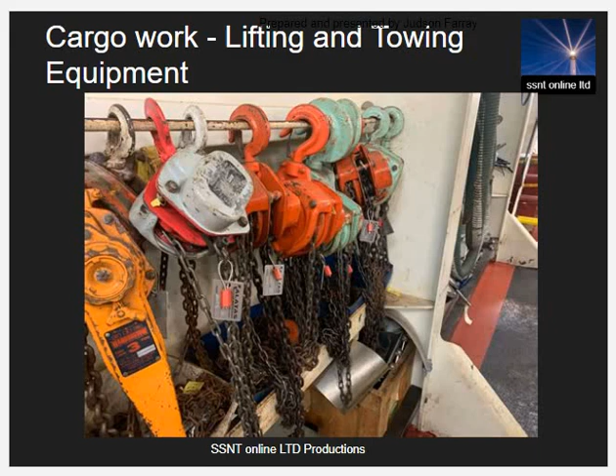All equipment used for lifting and towing operations should be certified and marked with its safe working load, inspected before and after every use, and monitored during use for damage or distortion. The Code of Safe Working Practice for Merchant Seafarers gives details for lifting and towing operations.

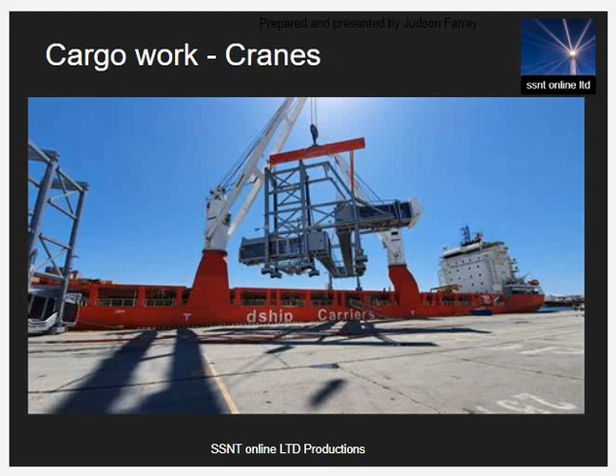The deck crew are directly involved in slinging cargo. The deck crew could be directing crane operators or operating a crane. The deck crew is responsible for securing the cargo to prevent movement of the cargo when the ship is at sea. Shifting cargo often leads to irreversible ship stability problems. These have proved to be catastrophic, especially in bad weather.

The slinging and securing duties involve a lot of manual handling. The Code of Safe Working Practice for Merchant Seafarers gives details for lifting and towing operations.

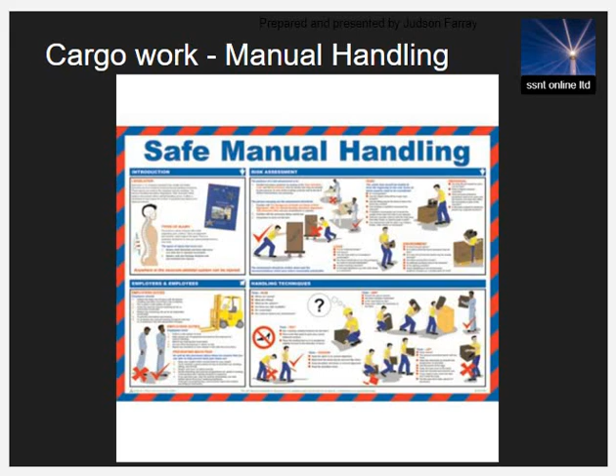Seafarers often carry dangerous goods. Toxicity and flammability are the main hazards. Dangerous goods carried in packages must be marked, handled, and stored as directed in the International Maritime Dangerous Goods Code.

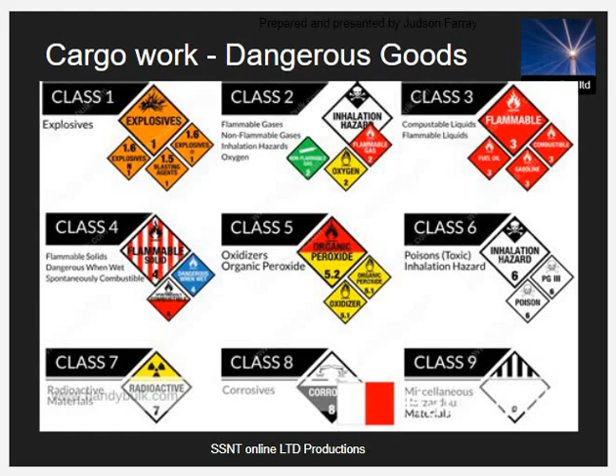When cargo is not in packages, it is carried in bulk. Bulk cargoes would be like oil in an oil tanker, or gravel in a barge.

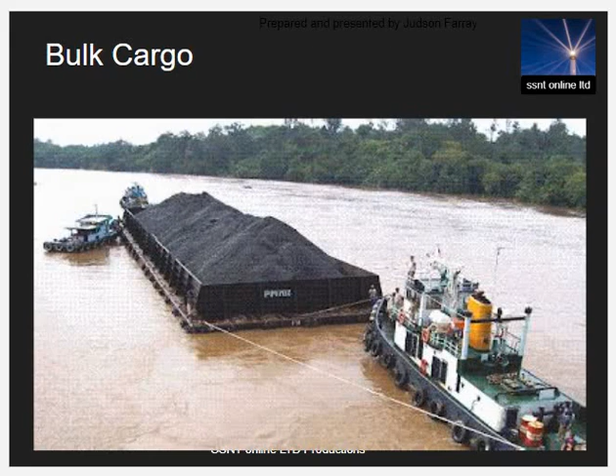The serviceability of the ship and equipment used for loading, carriage and discharge of cargo is top priority. The personnel maintaining the ship should be trained and competent in performing maintenance duties.

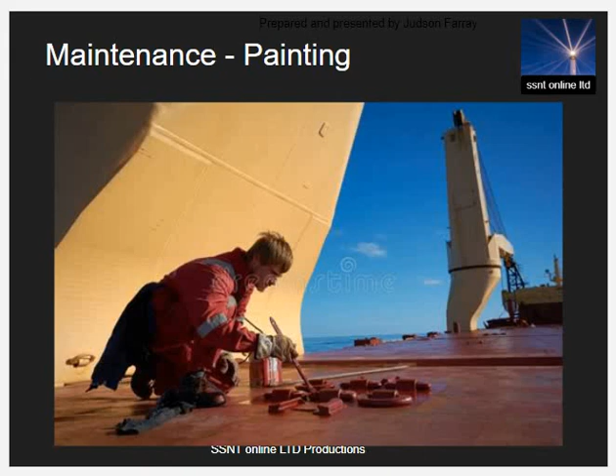The steel surfaces of the ship have to be protected from corrosion in the saltwater environment. This is achieved by cleaning the surfaces and applying layers of paint. Paint and cleaners emit fumes, but these are not a major problem on an open deck. The chemical cleaning, painting, or the repair of tank coatings may involve the release of solvent vapors.

Ships, even those that are not tankers, have many tanks. There are tanks named for what they carry, like freshwater tanks and fuel tanks. There are tanks named after where they are, like forepeak tanks and double-bottom tanks.

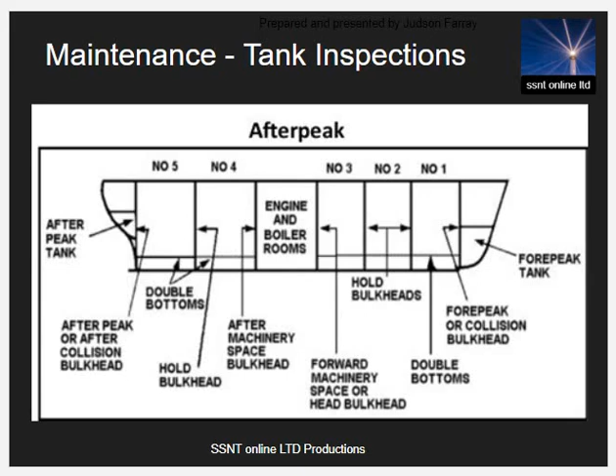Every tank on the ship has to be inspected every year. In bigger ships this involves personnel entering the tank. Entering the tanks allows us to see the condition of the tank coating and to see any damage to the structural members of the ship.

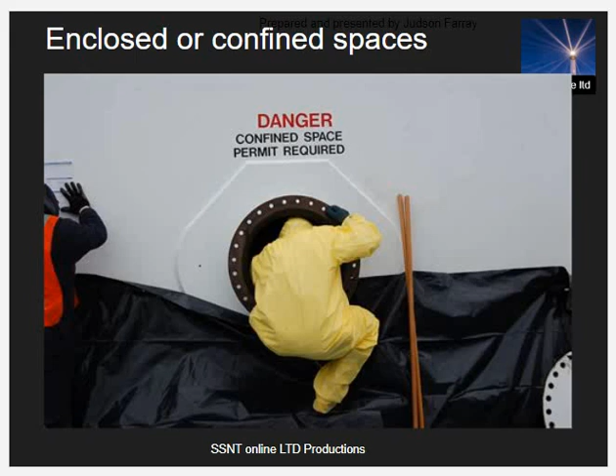When a tank has to be entered, the space should be considered to be deficient in oxygen and/or contain flammable or toxic fumes, gases, or vapors. Where possible, alternative means of working which avoid entering the space should be found.

A competent person should make an assessment of the space and a responsible officer should take charge of the operation. The potential hazards should be identified, and the space should be prepared and secured for entry.

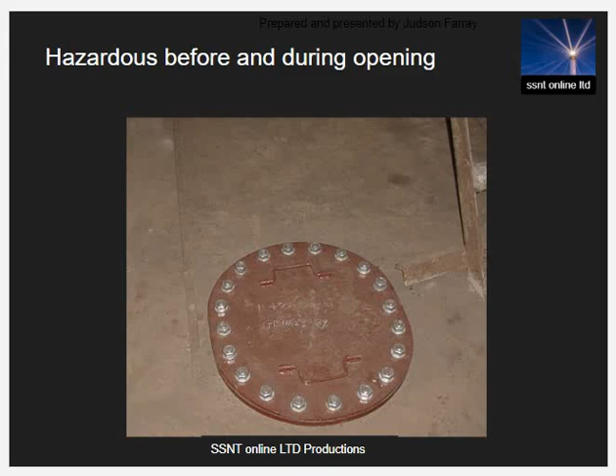When opening the entrance to a potentially dangerous space, precautions should be taken in case pressurized or unpressurized vapor or gases are released from the space. It is for the responsible officer to decide, on the basis of the risk assessment, the procedures to be followed for entry into a potentially dangerous space.

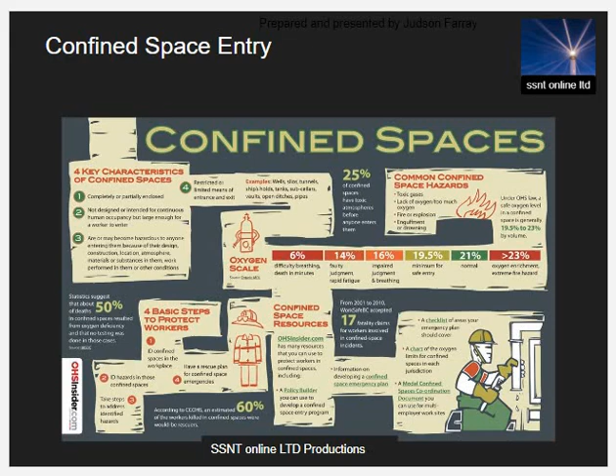Where the assessment shows that there is no immediate risk to health or life but that a risk could arise during the course of the work in the space, the precautions should be taken as appropriate. Where the risk to health or life is immediate, then additional requirements are necessary.

The risk assessment should include consideration of any potential hazards associated with the particular space to be entered. It should also take into consideration dangers from neighboring or connected spaces as well as the work that has to be done within the space.

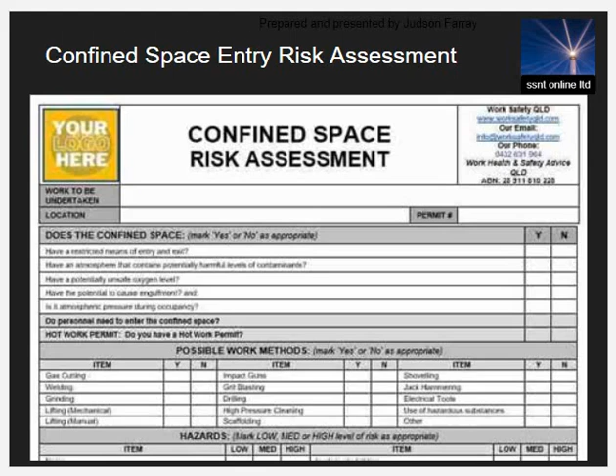A responsible officer is a person appointed to take charge of every operation where entry into a dangerous space is necessary. This officer may be the same as the competent person or another officer. No entry into a potentially dangerous space should be made until such suitably qualified persons are available.

If an empty tank or other confined space has been closed for a time, the oxygen content may have been reduced owing to a number of reasons. Rusting may have occurred due to oxygen combining with steel. Oxygen-absorbing chemicals may have been present.

Other spaces that are adjacent to the tank being entered may contain toxic or flammable vapors that could have leaked into the space. There is the possibility of leakage from drums of chemicals or other packages of dangerous goods where there has been mishandling, incorrect stowage, or damage due to heavy weather.

The atmosphere of the space should be tested. A permit-to-work system should be used. Procedures before and during the entry should be instituted.

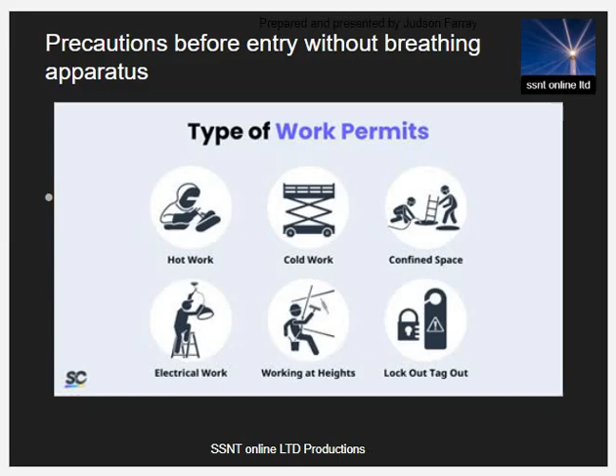Testing of a space should be carried out only by persons trained in the use of the equipment, before entry and at regular intervals thereafter. If possible, the testing of the atmosphere before entry should be made by remote means. If this is not possible, the person selected to enter the space to test the atmosphere should only do so in accordance with the additional precautions, which include the wearing of breathing apparatus.

Where appropriate, the testing of the space should be carried out at different levels. Where necessary, any sludge or other deposit liable to give off fumes should be cleaned out. This may in itself lead to the release of gases, and precautions should be taken.

The space should be thoroughly ventilated either by natural or mechanical means and then tested to ensure that all harmful gases are removed and no pockets of oxygen-deficient atmosphere remain. Compressed oxygen should not be used to ventilate any space.

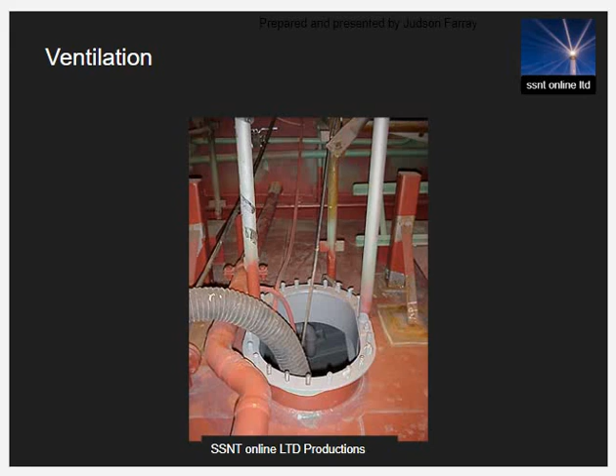The space should be isolated and secured against the ingress of dangerous substances by blanking off pipelines or other openings and by closing valves. Valves should then be lashed or some other means used to indicate that they are not to be opened, and notices placed on the relevant controls.

The officer on watch should be informed. Where necessary, pumping operations or cargo movements should be suspended when entry is being made into a dangerous space.

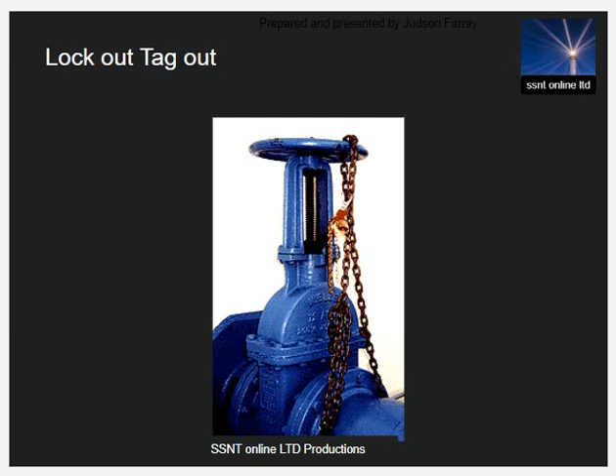Some monitoring equipment is designed for personal use, purely to provide a warning against oxygen deficiency and hydrocarbon concentrations when there is a change in conditions. This should not be used as a means of determining whether a dangerous space is safe to enter.

An emergency escape breathing device, EEBD, is a supplied air or oxygen device, only to be used for escape from a compartment that has a hazardous atmosphere.

They should not be worn by a rescuer to attempt a rescue of persons in any circumstances. EEBD shall not be used to fight fires, entering oxygen-deficient voids or tanks, or worn by firefighters. In these events, a self-contained breathing apparatus, which is specifically suited for such applications, should be used.

EEBD is not to be used for rescue. No one should enter any dangerous space to attempt a rescue without taking suitable precautions for his own safety, since not doing so would put his own life at risk and almost certainly prevent the person he intended to rescue being brought out alive.

Although the inhalation of contaminated air is the most likely route through which harmful substances enter the body, some chemicals can be absorbed through the skin.